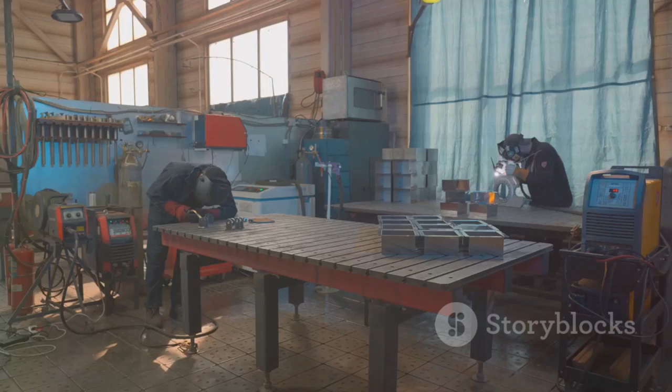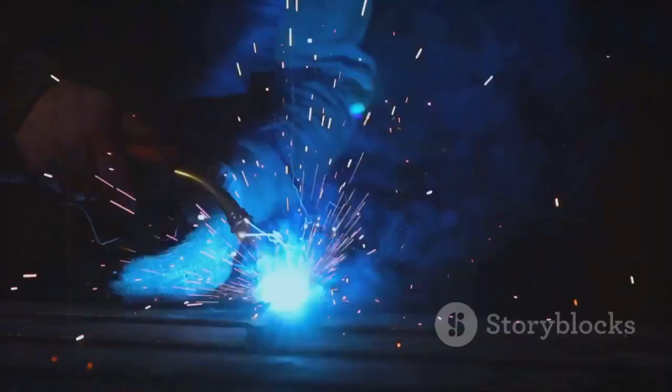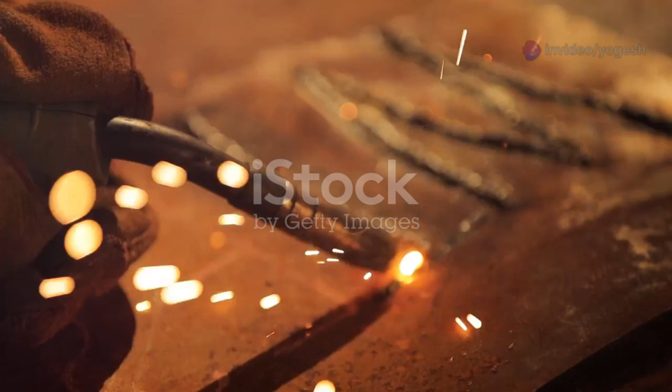On an engineering drawing, welding symbols are the most critical instructions you'll find. They tell you what kind of weld is needed, where it goes, and how it should be finished. It's a beautifully efficient system, packing tons of info into a tiny graphic. This isn't just about memorizing shapes, it's about understanding the logic behind them. These symbols are a powerful tool for communication, turning imagination into reality. Let's get started.

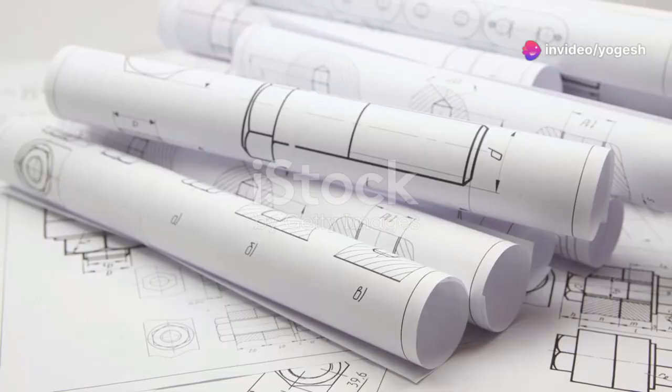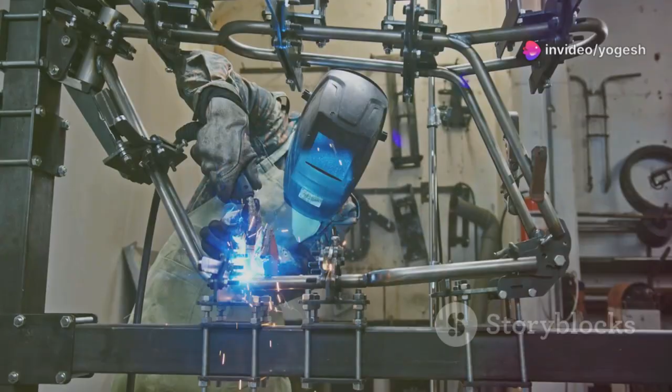Why all the symbols? Why not just write, put a 1/4 inch weld here? Simple efficiency and clarity. Imagine a complex drawing for a skyscraper or airplane wing. Writing out every weld instruction would be chaos. Symbols condense instructions into neat, compact graphics, saving space and reducing confusion. More importantly, they create a universal standard. A V-groove weld symbol means the same thing worldwide. This global consistency eliminates ambiguity and prevents dangerous misinterpretation.

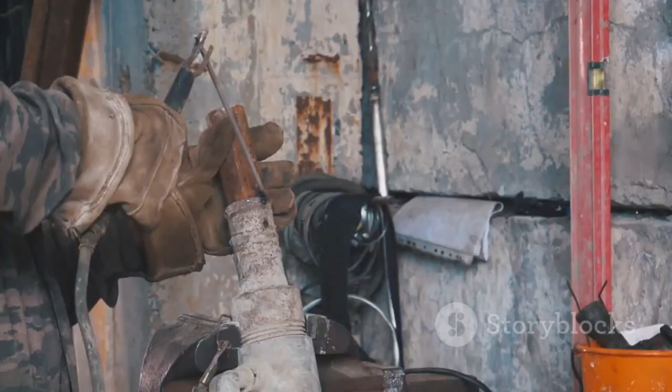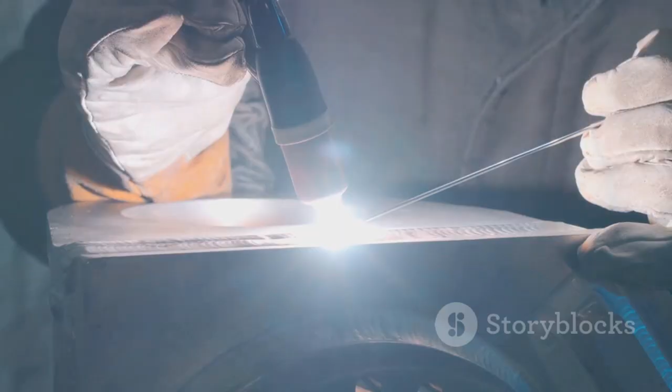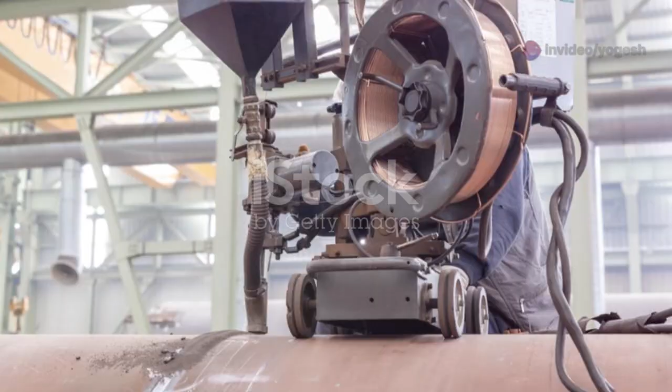Welding symbols precisely indicate which side of the joint to weld. No room for doubt. This precision is the bedrock of good engineering, ensuring the welder executes the designer's intent exactly. It saves time, money, and materials, and most importantly, keeps structures safe. Adopting this symbolic language is a massive leap forward in communication. It's like using a chemical formula instead of a paragraph. Faster, clearer, and universally understood. Welding symbols are the elegant shorthand of fabrication. They ensure what's designed is what's built every time.

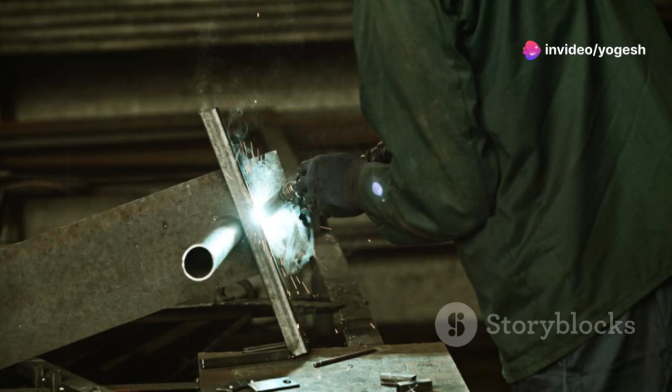Let's break down every welding symbol into its 3 core parts: reference line, arrow, and tail. The reference line is always horizontal, the foundation for all info. The arrow points to the exact joint needing the weld. Your X marks the spot. Placement matters: symbol below the line means weld on the arrow side. Above means the other side. If you see symbols on both sides, weld both sides.

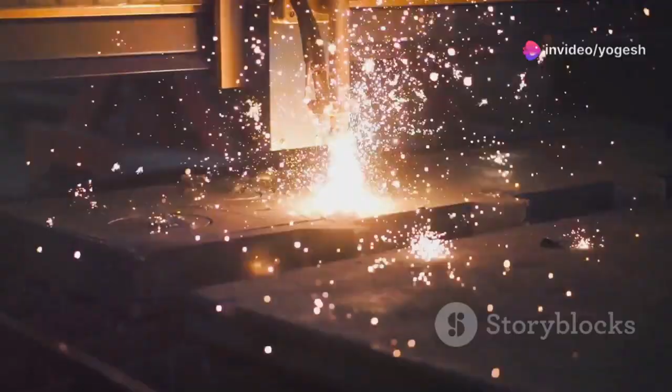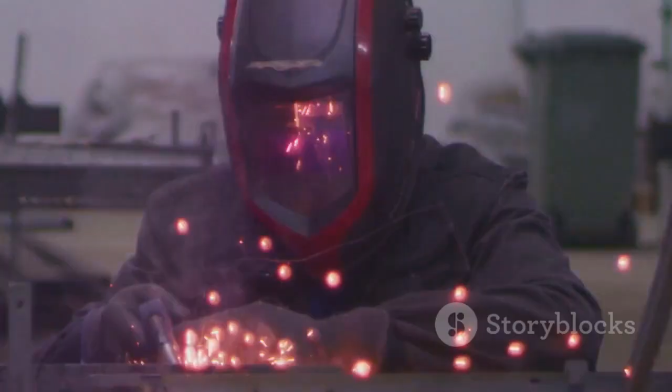The tail, a V shape at the end, is optional and holds special notes or process info. For example, GTAW in the tail specifies the welding process. No tail? The process is up to the welder or noted elsewhere. Think of the tail as the special instructions box. Master these 3 components, and you've learned the grammar of welding's language. Reference line, arrow, tail. Get these, and you're halfway there. Now let's learn the vocabulary.

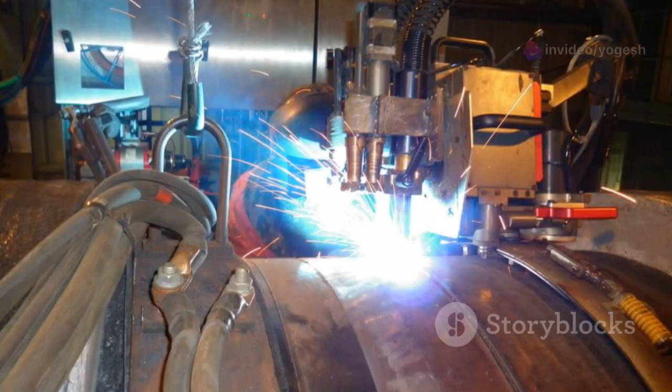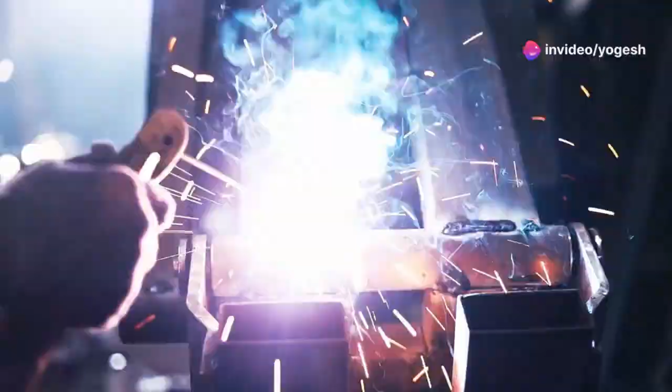Now, let's fill in the structure with the most common weld symbols. The fillet weld, represented by a right-angled triangle, is the most common. It joins 2 surfaces at an angle, like a T-joint. Triangle below the line, weld on the arrow side. Above, other side. Groove welds join 2 pieces edge to edge. The symbol looks like a cross-section of the groove: V, U, J, or parallel lines. These symbols tell you how to prep the metal for deep, strong welds.

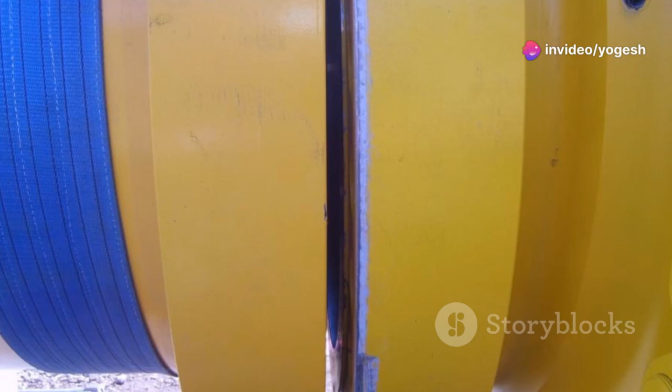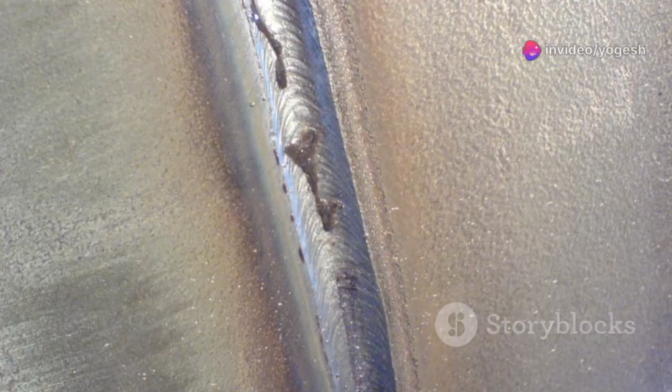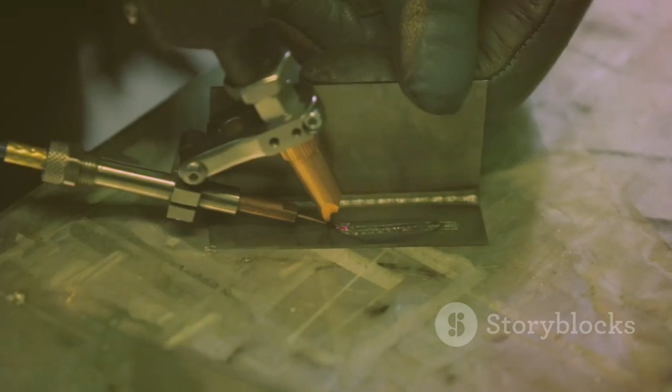Plug or slot welds use a rectangle, weld through a hole or slot to join overlapping plates. Spot welds, a circle, and seam welds, circle with lines, are common in sheet metal work. Surfacing welds, scalloped line, add material to a surface, not joining parts. Great for repairs or hard facing. These basic symbols—fillet, groove, plug, spot, surfacing—cover 90% of what you'll see. Learn these, and you'll read most welding instructions with confidence. Each symbol is a shortcut to a specific weld type. Recognize them, and you're well on your way.

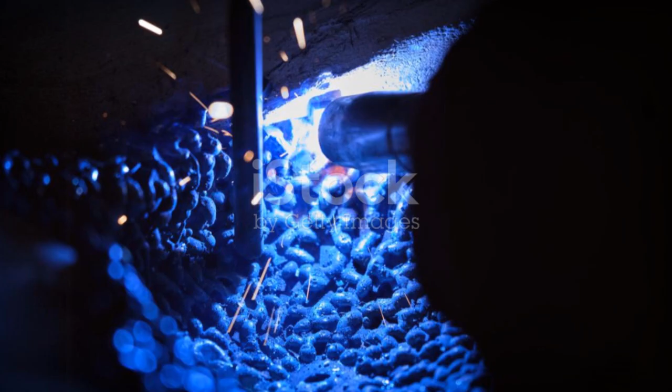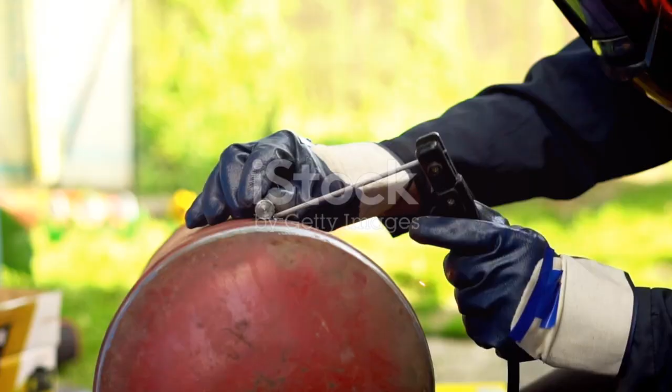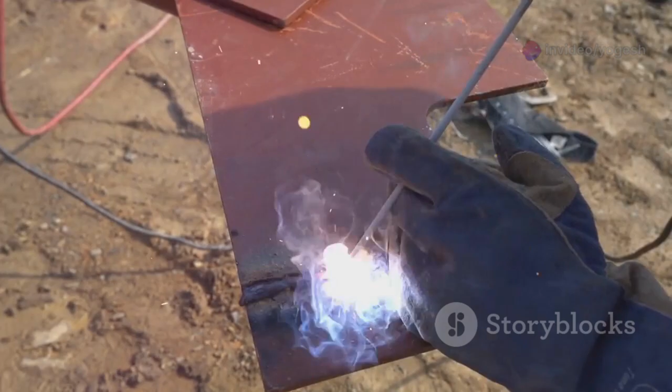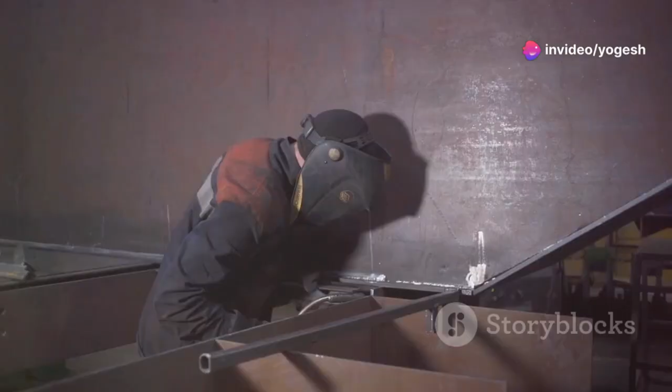Let's add more detail. Engineers use supplementary symbols to add detail. The weld all-around symbol, a circle at the arrow reference line intersection, means weld the entire joint perimeter. The field weld symbol, a solid flag, means the weld must be done on site, not in the shop. Contour symbols specify the weld's final shape: flat, straight line, convex, upward curve, or concave, downward curve. These affect stress distribution and are critical for performance.

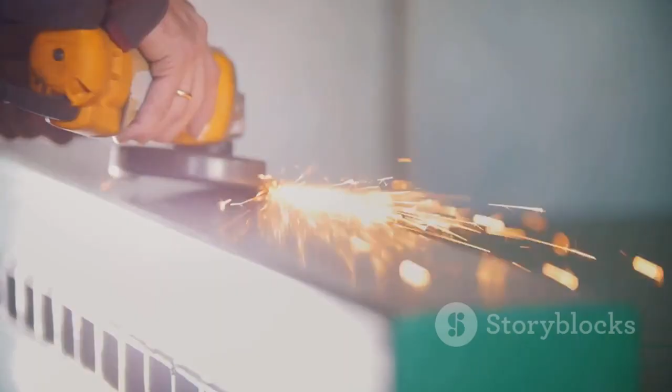Finish symbols. Letters like G, grinding, M, machining, or C, chipping, show how to achieve the final contour. For example, a flat line with a G above a fillet symbol means fillet weld, then grind flat. Supplementary symbols turn basic instructions into a detailed recipe. They add precision for high-performance welds.

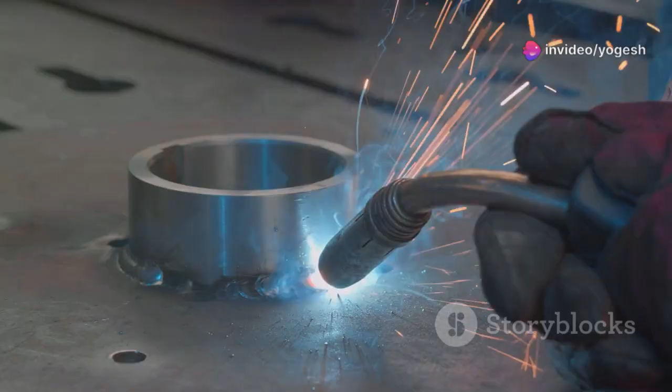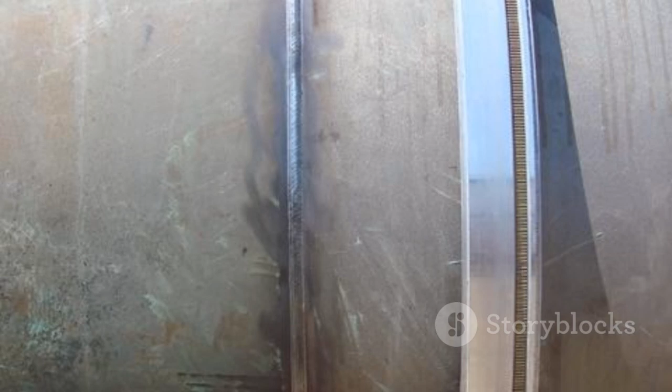Let's see how dimensions fit in. Weld size is crucial. Dimensions are always part of the symbol. For fillet welds, the number to the left of the triangle is the leg length. For intermittent welds, numbers to the right indicate length and pitch, spacing. Groove welds may show depth to the left and root opening or angle inside the symbol. For example, 1/4 left of a triangle means 1/4 inch legs.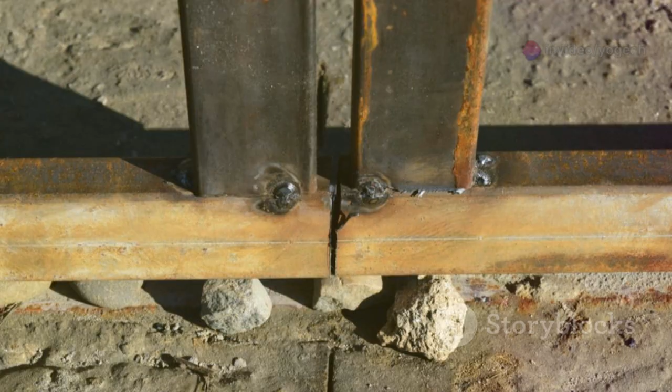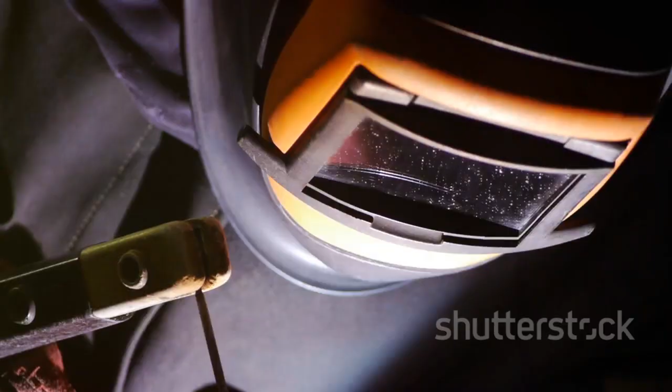2/6 right of the symbol means 2-inch welds every 6 inches. Plug or slot welds use numbers for diameter or width, left, and spacing, right. The placement of numbers is systematic: size to the left, length and pitch to the right, angles and root openings inside. Once you know this logic, extracting info is quick and easy. Dimensions make the symbol a complete instruction. Practice reading them, and it becomes second nature.

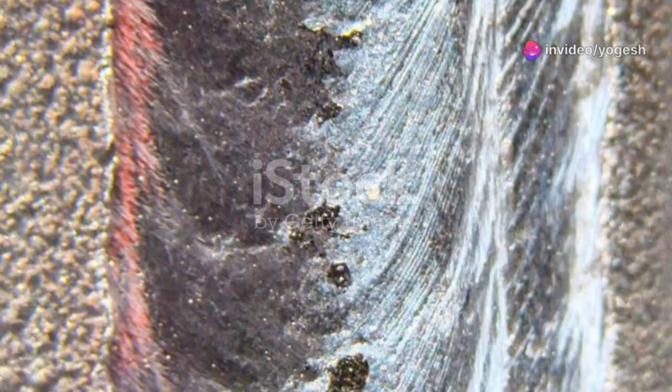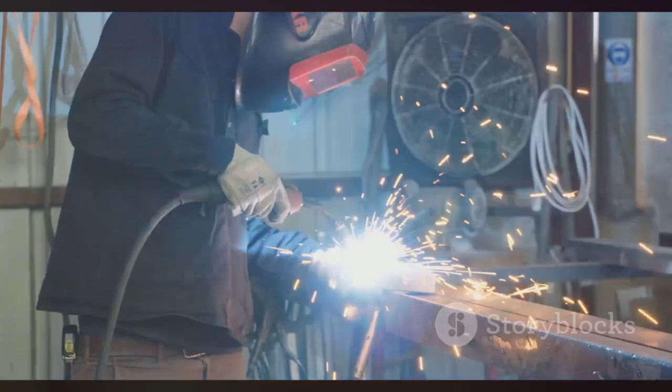Now, let's see real examples. Let's apply what we've learned to real drawings. Example 1: T-joint. Arrow points to the corner, triangle below the line, 1/4 to the left. That means a 1/4 inch fillet weld on the arrow side. Example 2: Butt joint. V-groove symbol, 60 degree inside, 1/2 to the left.

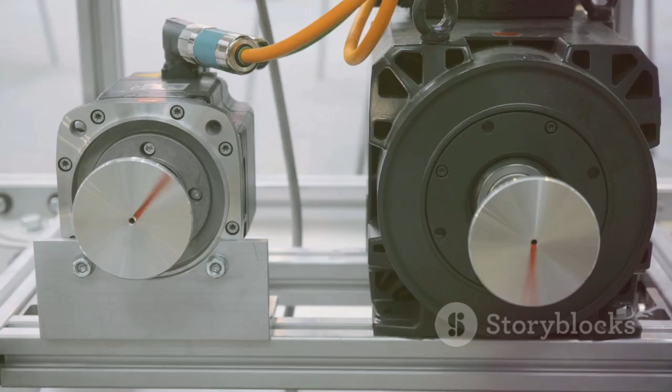Weld both sides. Example 3: Surfacing weld on a shaft. Scallop symbol, 1/8 to the left, EH14 in the tail. These symbols show location, type, size, and special instructions. Practice decoding, and soon you'll visualize the whole process.

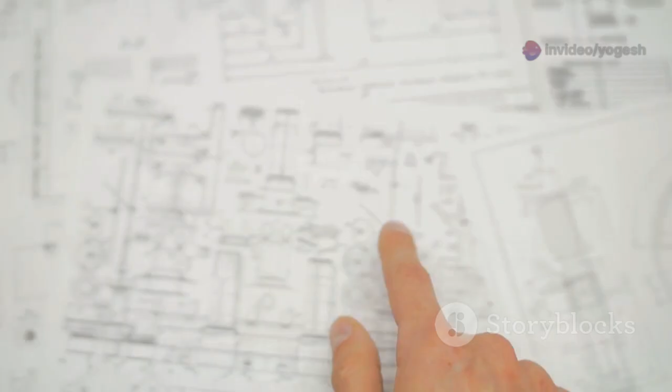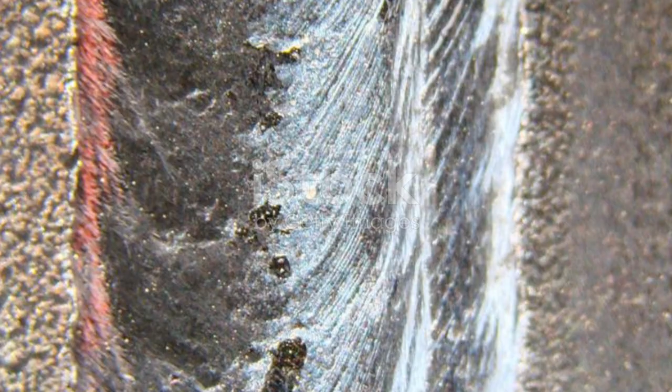Let's wrap up with a cheat sheet. Here's your quick reference checklist for any welding symbol. Find the reference line and arrow. The arrow points to the joint. Arrow side versus other side: symbol below the line means arrow side, above means opposite. Check for a tail. Read any special notes inside. Identify the weld type: triangle, fillet; V, U, parallel lines, groove; circle, spot; scalloped, surfacing.

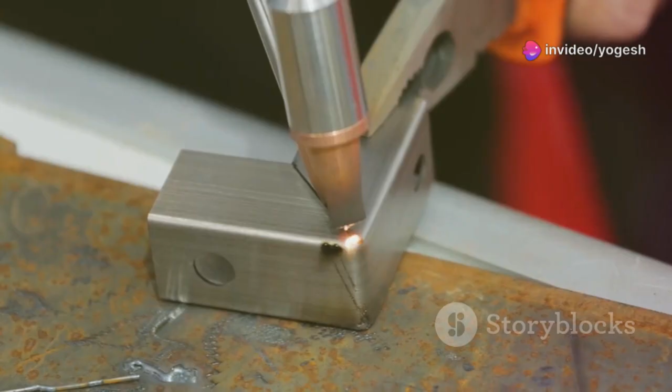Numbers to the left equals size, right equals length and pitch, inside equals angle and root opening. Look for supplementary symbols: circle, weld all around; flag, field weld. Contour and finish: flat, convex, concave lines. G, M, C for grinding, machining, chipping. Walk through these steps every time. It's a systematic process. No magic, just logic. Practice, and you'll read symbols as easily as text. Confidence comes from repetition. You've got this.

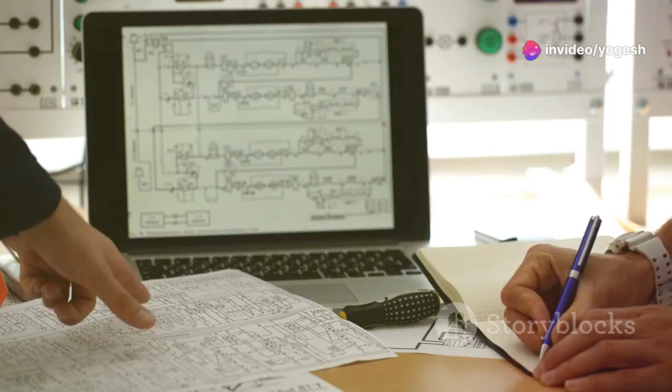We've unlocked the language of welding symbols, from reference lines to finish details. These aren't just squiggles, they're your guide to building strong, reliable things. Understanding them empowers both designers and builders to work together seamlessly. Next time you see a drawing, lean in and decode the symbols. Practice makes it second nature. Soon, you'll visualize the entire fabrication process from a single symbol. This is true mastery, turning drawings into reality.

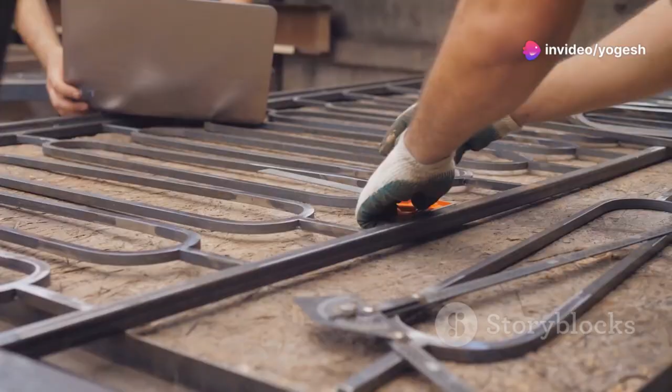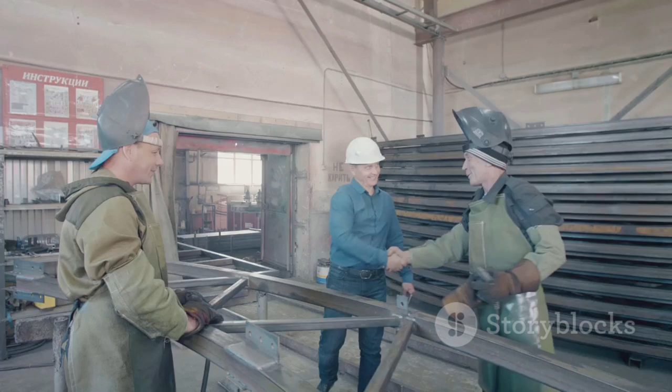Communication, collaboration, and building cool stuff. That's what it's all about. These symbols are elegant solutions to complex problems. You now have the key to a deeper understanding of every project. So, go forth, be curious, and keep building. The world is held together by welds, and now you speak their language. Go build something amazing.